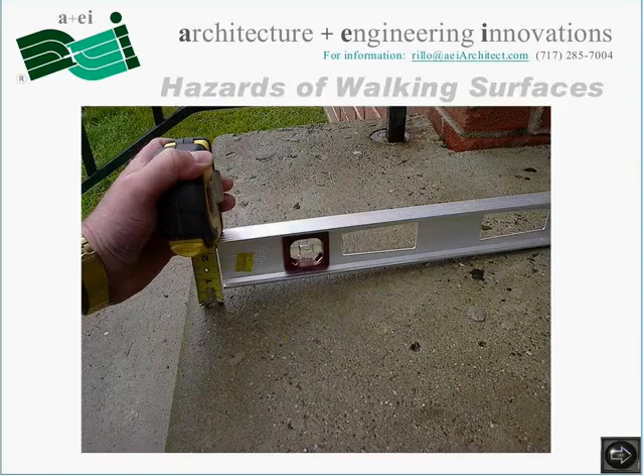So, getting started, today we're going to be talking about walking surfaces. Walking surfaces have occurred in nature for as long as there has been a place to walk, and probably before man invented litigation. Unfortunately, Earth's wrinkly old crust is difficult for bipeds to negotiate. So, to compensate for our two-legged disadvantage, mankind invented walking surfaces to accommodate pedestrians. Unfortunately, not all of man's inventions are pleasant to interact with. If walking surfaces are not properly designed, constructed, and maintained, they can be a hazard rather than an accommodation to pedestrians.

So today, I'd like to examine commonly accepted standards of design, construction, and maintenance for walking surfaces. During this seminar, I will focus on physical components of walking surfaces, and I will describe the intent of recognized codes and standards that regulate conditions found in walking surfaces. I will not cite chapter and verse of specific publications, since we can cover more territory by making general reference to the intent of the codes and standards, and the focus of this seminar is to cover as much as we can on the physical conditions of the walking surfaces.

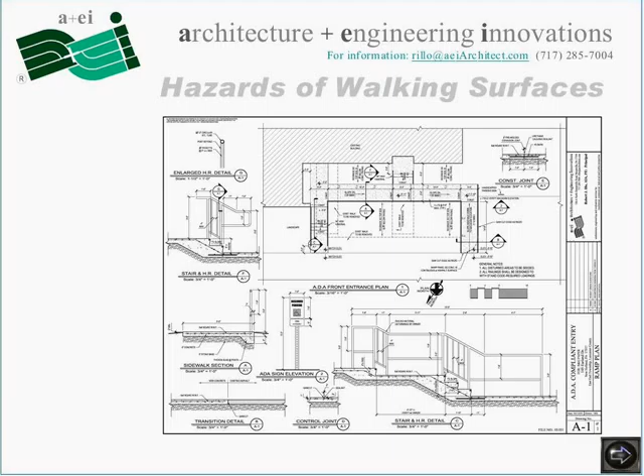So I will start with the idea of a planar walking surface. That does not mean level necessarily, but in the same plane.

Excuse me, Bob, I think you're breaking up a little bit. Yeah, I hope that everybody can hear the audio. Yeah, you were just breaking up a little bit there. I didn't mean to interrupt, but you were breaking up a little. Yeah, is there some spot to which I should go back to make sure everything has come through? No, I think everyone's here, but you're still breaking up a little bit.

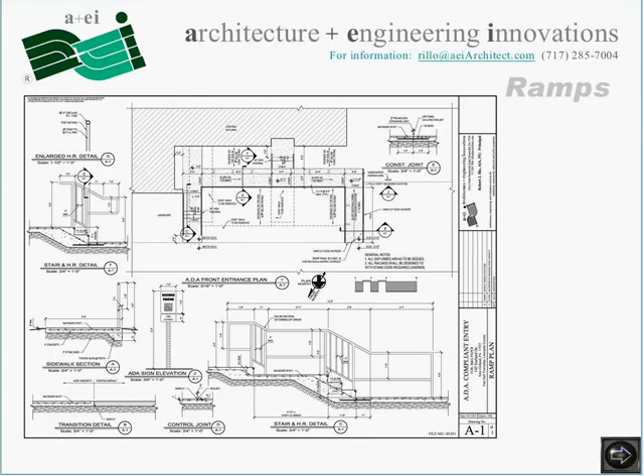Ramps must be constructed to a minimum width, depending on conditions, location, and use of the ramp. Most ramps must be 3 feet or wider. Ramps are limited to a maximum rate of slope; in most cases, this rate is 1 vertical unit for every 12 horizontal units, or 1 inch of rise per foot of run. So a ramp that connects a sidewalk with a landing 20 inches higher than the sidewalk would have to be 20 feet long. Ramps cannot exceed 30 inches of rise.

For ramps that connect walking surfaces with a change in elevation greater than 30 inches, a landing must be provided. Landings must be at least as long as the width of the ramp.

Any ramp with a total rise of 6 inches or more, depending on the applicable code, must conform to requirements for the configuration of its edges. These higher ramps must have curbs or alternate structures at the edges to prevent the wheel of a wheelchair or a foot from traveling over the edge of the ramp. Railings are also required at the edges of these higher ramps.

Ramps with less than 6 inches of rise are exempt from these edge conditions to allow curb cuts in sidewalks, for instance, so that those curb cuts would be free from railings that would obstruct pedestrian traffic on busy streets or in parking lots. Other regulations apply to curb cuts to prevent the edges, which are subject to cross traffic, from presenting a tripping hazard.

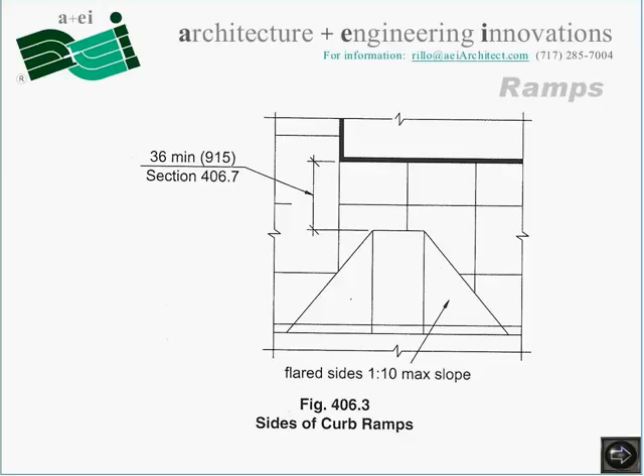Edges of curb cuts must be sloped or flared to eliminate a vertical edge. The rate of slope on these flares is allowed to exceed the rate of slope on the curb cut, but it cannot exceed a rate of 1 vertical unit for every 10 horizontal units, so that it doesn't become a tripping hazard itself.

Another means of negotiating a large change in elevation is the use of steps. Like ramps, steps of a certain rise are required to have railings. The amount of rise depends upon the location, usage, and governing regulation, but in most cases, any set of steps that exceeds 2 or 3 risers must have a railing.

Building codes refer to the vertical portion of a step as a riser, and the horizontal portion as a tread. The maximum and minimum heights of risers are regulated. Likewise, the depths of treads are regulated. These limits are established to control the steepness of the steps. For most interior stairs used for egress from a building, treads may not be less than 11 inches deep, and risers may not be more than 7 inches high.

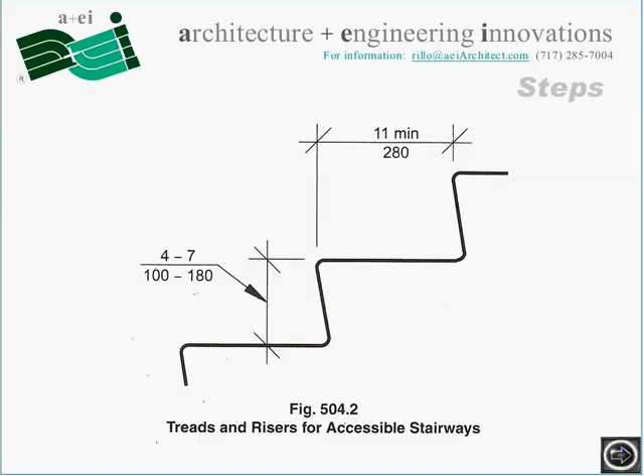Exceptions exist for these limits depending on the usage of the building. All risers and treads within a stairway should be the same dimension. Most building codes limit the dimensional variation between adjacent treads and risers to 3/8 of an inch within the flight of steps. The surfaces of the treads and landings within a stairway should also be level.

Building codes prescribe a maximum slope on these surfaces. On exterior steps, a slope is desirable to prevent the accumulation of water on the walking surface. The nosing of the tread must project past the riser. Building codes prescribe the amount of projection, usually about an inch. A projecting nosing allows more room on the tread below to support the foot of an ascending pedestrian.

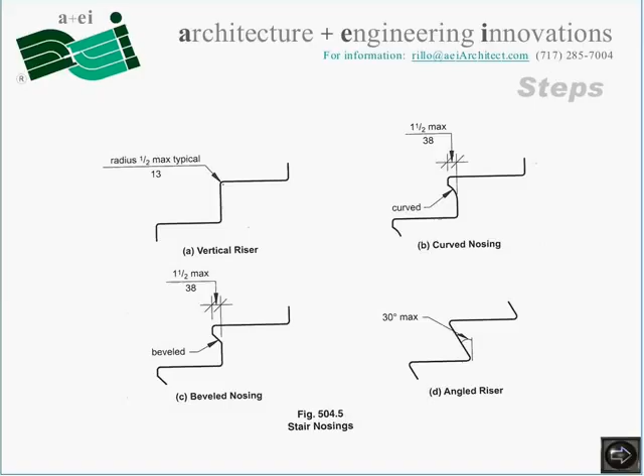Stairs must maintain a minimum width as prescribed in the building code, depending upon the usage of the stair and the volume of traffic the stairs are required to accommodate. Most stairs are about 4 feet wide, but different widths will be required. Narrower stairs are permitted in some cases, and wider stairs are required in others.

Stairways are required to have landings at intervals dictated by the applicable building code. Most codes limit the maximum rise of a flight of steps to 12 feet measured vertically. So, for instance, in a building that has 13 feet between stories, and that's not a common condition, by the way, an intermediate landing would be required in the stairs.

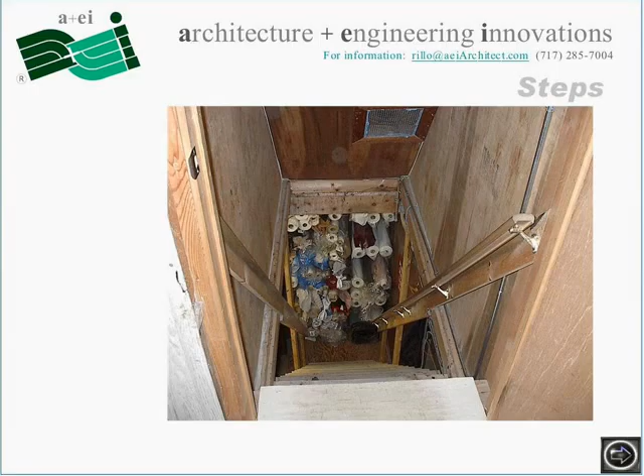Headroom is a feature of walkway safety, often overlooked in stairs and ramps. While descending a set of steps or ramps, the overhead structure appears lower, and it can present a distraction. So the code makes a minimum headroom or overhead clearance requirement in stairs. Distractions of any sort in a stairway are discouraged, as with many walking surfaces that negotiate a change in elevation.

As we discussed before, landings are provided in stairs and ramps to provide relief in the vertical progress of pedestrians, whether that progress is upward or downward, or whether it is controlled or accidental. A landing can also be at a doorway or any other interruption along a walking path, to provide a transition from negotiating the doorway to the task of stepping down or up a flight of steps or ramp. A landing can also be a means of dealing with a distraction along the walking path, such as at a display, window, or advertisement.

Landings are required at any change in the direction of travel along a ramp or stairway. Landings are often elevated above an adjacent ground or floor surface. Therefore, the edges of landings must be equipped with a railing, a wall, or another barrier to prevent a pedestrian from falling over the edge of the landing.

Building codes place railings into two categories: guard railings and hand railings. The purpose of a guardrail is to prevent a fall over the edge of a set of steps, a landing, a ramp, or other elevated walking surface. A guard railing prevents a fall perpendicular to the direction of travel. The purpose of a hand railing is to prevent a fall down the ramp or steps, so a handrail prevents a fall parallel to the direction of travel.

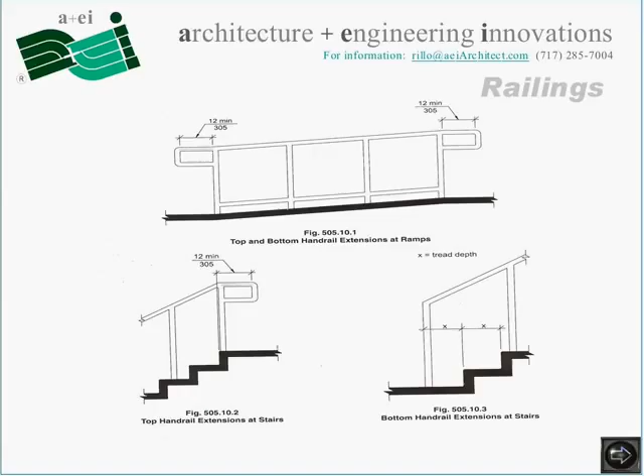Hand railings on stairs and ramps are required to extend beyond the tops and bottoms of the ramps or stairs. These extensions are provided to give the pedestrian cues and assistance at the point of transition between horizontal travel and inclined travel. The distance and slope of these extensions are prescribed by code.

The height of a handrail is prescribed by code to be at a height that is easily grasped by pedestrians using the stair or ramp, especially in the event of a fall. Most codes require handrails to be no less than 34 inches and no more than 38 inches above the plane of travel. Most codes prescribe that guardrails, by contrast, be at least 42 inches high.

As a result, stairs and ramps that require both a guard at their edge and a handrail at the side must have two structures, since the guard must be higher than the handrail and it cannot serve both functions of guarding and handrail.

Most codes require a handrail within 30 inches of any point along the width of a stair. Handrails must have a profile that can be easily grasped. This requirement does not apply to guardrails, since a guardrail does not rely on grasping to provide protection.

Guardrails must be constructed with limitations on the size of the opening below the rail. Building codes prescribe a range of permissible opening sizes to ensure the effectiveness of the guard in preventing a person from passing through the guard, under the rail, and over the edge of a stair or elevated walking surface.

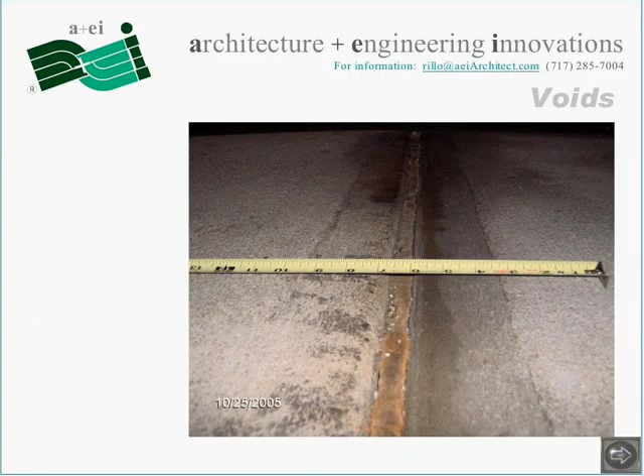Improper construction can result in voids at joints in the pavement that are not filled with proper materials that allow for expansion of the pavement, but can support the forces imposed by foot traffic, such as spiked heels. Improper maintenance can result in voids in the walking surface as well, caused by deterioration of the pavement or uncontrolled movement at a pavement joint.

A curb is a continuous change in elevation without a protective guardrail that can cause a tripping hazard. Curbs also provide the useful service of segregating vehicular traffic from pedestrian traffic, so their inherent hazard is tolerated because of the hazard that they mitigate.

Despite their virtues, curbs should still be handled with caution. A curb must be made clearly visible and located in a predictable place. The top of the curb should be flush with the adjacent sidewalk so that pedestrians descending the curb do not trip on their way out into traffic.

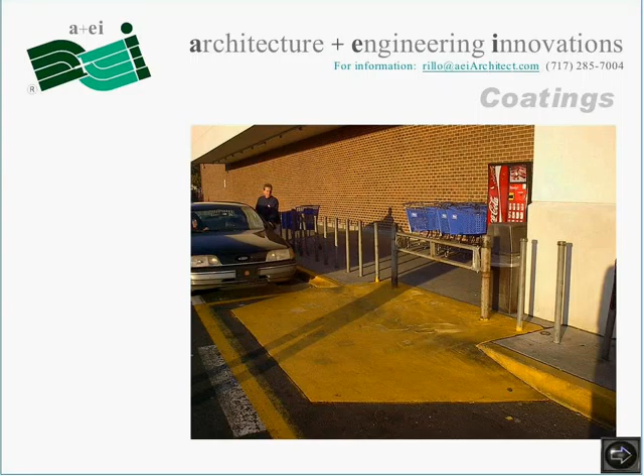I'm just going to go to that slide while I address it. In this area, there's yellow paint at the edge of the curb. And again, the purpose of that yellow paint is twofold. One, it's to warn against parking so that the ramp is not blocked by somebody who parks at the curb. And it's also to warn pedestrians of a change in elevation. Yeah, hey Charles, was that the slide you were referring to?

No, I have feedback that the slide is the one with the paint on the sides of the ramp. I think that was an asphalt ramp. I'm going to pull that slide up. This is the one. Yeah, so I think that covers all the ramps with yellow paint that we've got. That's the one. Okay, thank you, Charles. And again, similar reasons for this.

Obviously, that one's not there to prevent people from parking. That's the yellow paint that we see on the side of the ramp, which can be a tripping or stumbling hazard, and so it's painted yellow to warn pedestrians who are stepping down from the curb or stepping up to the curb that there's a change in elevation and a slope.

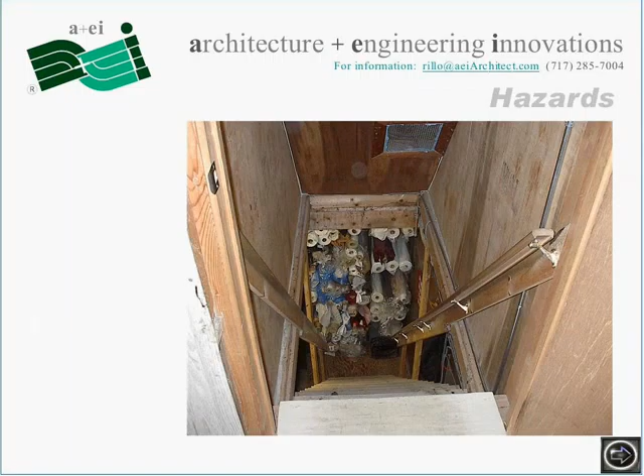Similarly, the severity of a hazard is influenced by the level of supervision associated with that particular area of the built environment. For instance, an industrial walkway restricted only to use by trained personnel, like this industrial catwalk, would have a different burden of safety than, say, a stair in a private residence or a stair along a handicap-accessible walking route. Obviously, that's a higher burden because it's both used by the public and by persons who may have a limited physical ability.

A long handicap-accessible ramp or public sidewalk, different burdens apply as well. And we talked about how a curb is something that should not be a surprise to most people, as we expect to see one at the edge of a sidewalk between pedestrian traffic and vehicular traffic.

I'm looking at a question from Bob asking, does weight of pedestrian on wet, mildewy surface affect slipperiness of the surface? That is, does a heavier person have a greater likelihood to slip than a lighter person?

Now, according to the laws of physics, Bob, the coefficient of friction does not increase as a function of weight. It simply is the ratio of the slip resistance, the horizontal force required to cause slip, to the vertical weight. So if somebody were, say, 200 pounds with a coefficient of friction of 0.5, it would take a 100-pound horizontal force. So the same surface would require a 400-pound person to require a 200-pound horizontal force. Same ratio, same coefficient of friction.

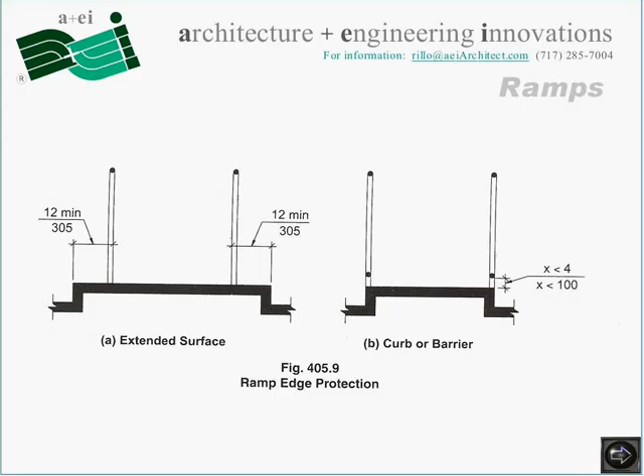Can you go back to the void slide from the beginning and just cover that briefly? I think that was during the scrambled audio as well. Yes, and I'm sorry, I was looking for a slide illustrative of that, but I missed the question.

Sure, she's working on a matter where an individual tripped on a slightly uneven paved surface with deterioration in the pavement. Can you go back to the void slide from the beginning and discuss that topic briefly?

Yes. The issue that deteriorated concrete presents as a hazard falls into two categories. One, a void that could cause destabilization if it's large enough as the pedestrian steps into it. The other is that deteriorated concrete can present a vertical edge, as seen here, which can then serve as a tripping surface. So this again falls into the category of a maintenance problem rather than a design or construction problem.

However, there are design measures and construction measures that can make it less likely for these types of voids or for pavement to deteriorate.

Thank you. We now have a question from Stuart. This is a follow-up to the liquid detergent falling on the grocery floor. He asks, what if the display is put in the wrong place in the supermarket? I need a little more background on that.